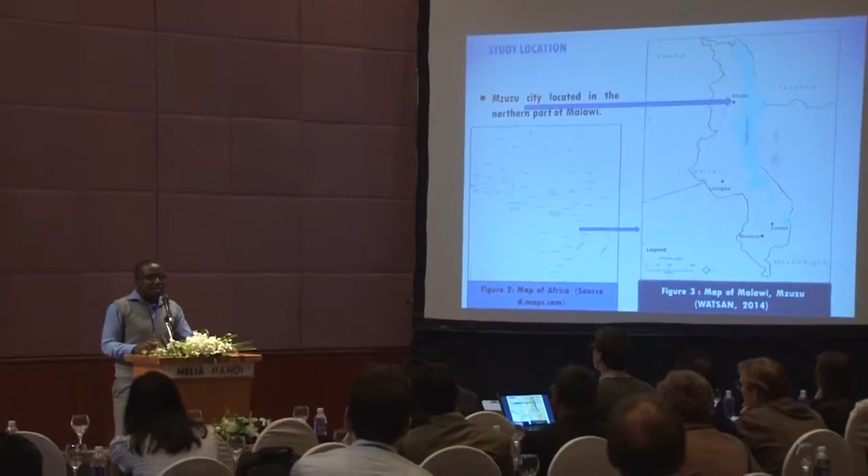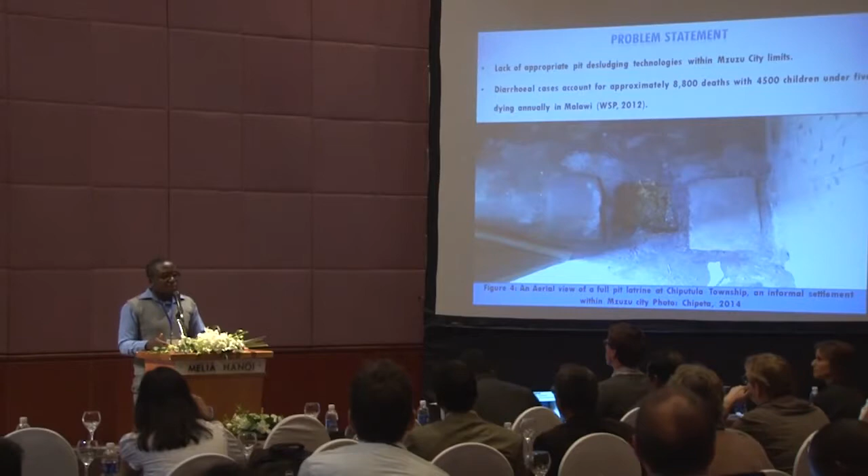The major challenge being experienced in Mzuzu City is lack of appropriate pit desludging technologies. In Mzuzu City, there are vacuum tankers that are run by the municipal authorities, but also by private operators. These vacuum tankers mainly patronize the planned areas and empty septic tanks. And the only option that is left for those that are using pit latrines is that they either have to look at the possibility to dig a new pit latrine and meet space constraints, or rely on informal pit emptiers, which are just manual pit emptiers, which can be associated with a lot of health risks for pit emptiers and also the households themselves.

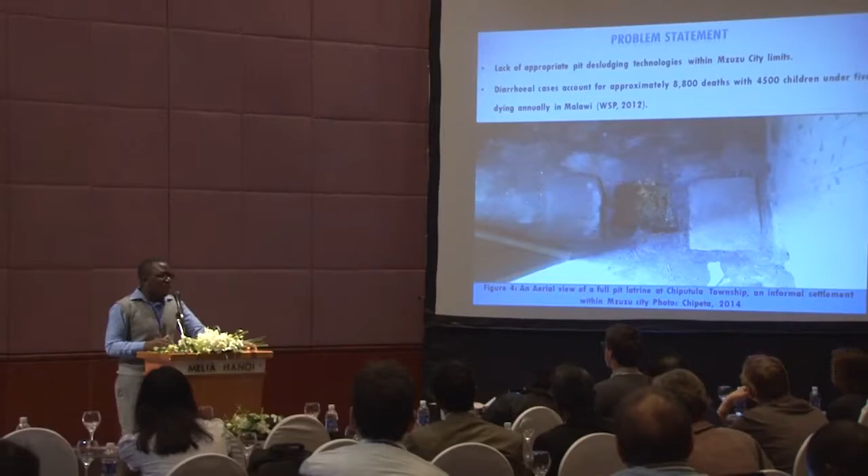And here is just a picture from one of the informal settlements, Chiputula, just to highlight this aerial pictorial view of a full pit latrine, which we try to alleviate by possibly suggesting technologies that are relevant and contextual to Mzuzu City.

Just a bit of background. The main criteria focused upon for the technologies is that we thought of developing a technology that is low cost, effective, safe, and sustainable. And within these parameters, when we did the literature research, we focused upon modification of the treadle pump. These are pumps that are normally used for irrigation, and they depend on suction power to empty, and they use treadles that manipulate a rope which goes around a pulley, and they use piston strokes that move up and down.

The upward stroke sucks up the sludge in this case, and the downward stroke pushes the sludge so that it can move to the discharge pipe. And from this conceptual setting, we adapted the technology with the support of other consultants, especially our friends from irrigation, on how we can adapt the technology for pit emptying.

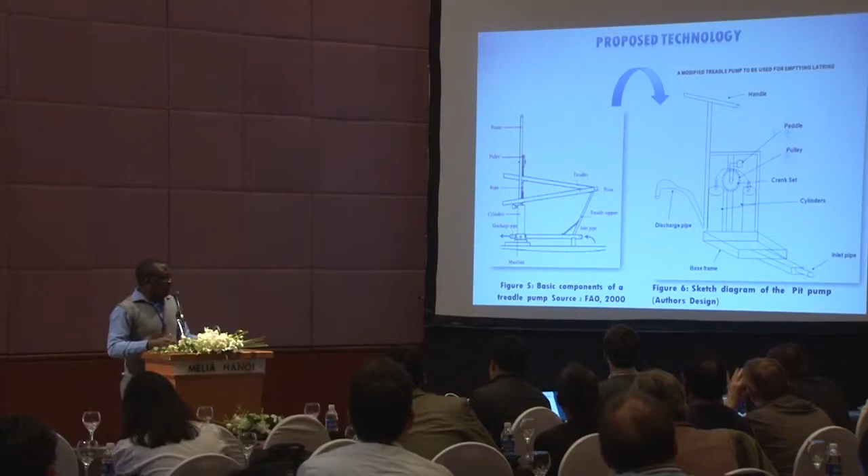So, on the other part is the sketch diagram of the pump, which is the conceptual setting. And on this, what we did is just to replace the rope with a bicycle chain, and also to put pedals instead of the normal treadles, so that we can see if possibly this can also be used as another technology for pit emptying.

And the discussion on the changes that we have made regarding the pros and cons of the technologies are as follows. Firstly, we believe that the technology can potentially be low cost and sustainable because all the materials that are being used are available locally, whether it is the chain parts or the other nuts and bolts, available in many shops in the developing country context.

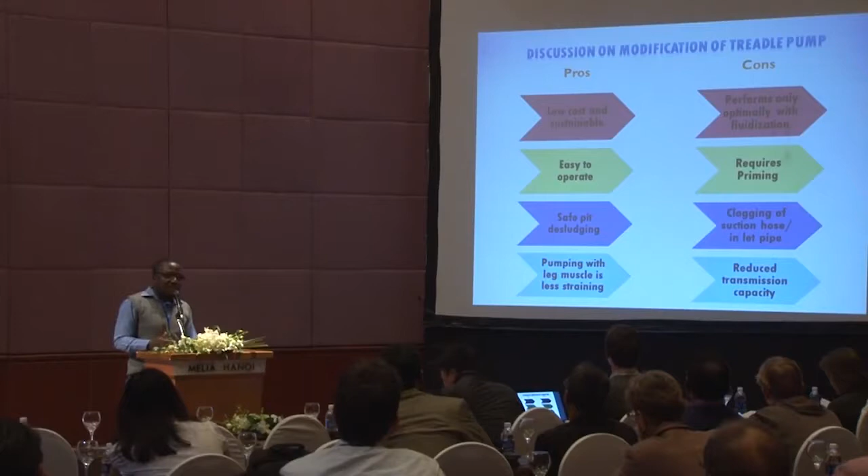And again, we believe that it can be potentially easy to operate because it can be almost like using a bike, so it is literally something that people can easily adopt and use. And also on the safety part, we are looking at the possibility that with the treadle pump, you can just insert a hose in the sanitation hole and possibly just cycle outside the pit latrine. So that can be helpful, especially in pit latrines that are light, that sometimes when you try to empty it from inside the pit, they can potentially collapse because of the weakening of the surrounding pit.

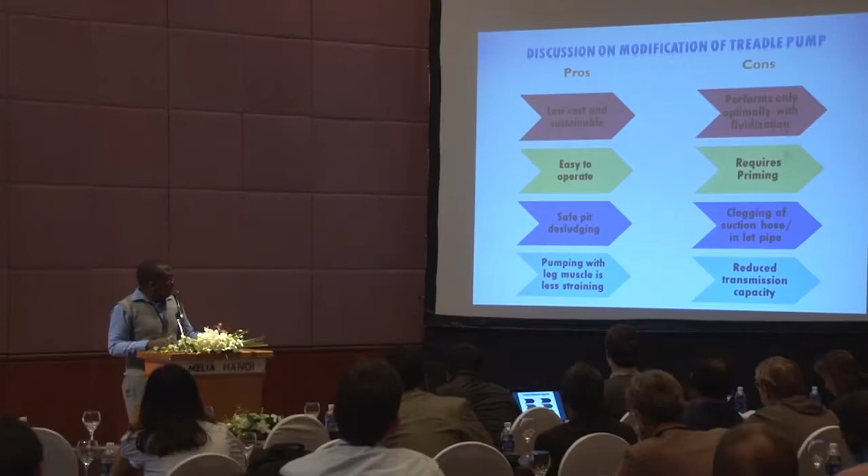And finally, we thought that for this technology, the major advantage can be that pumping with leg muscles can be potentially useful and less straining than using upper body strength. And on the con side, we also looked at the possibility that this technology can only perform optimally when the sludge that you are trying to empty is fluidized so that the pumping can take place.

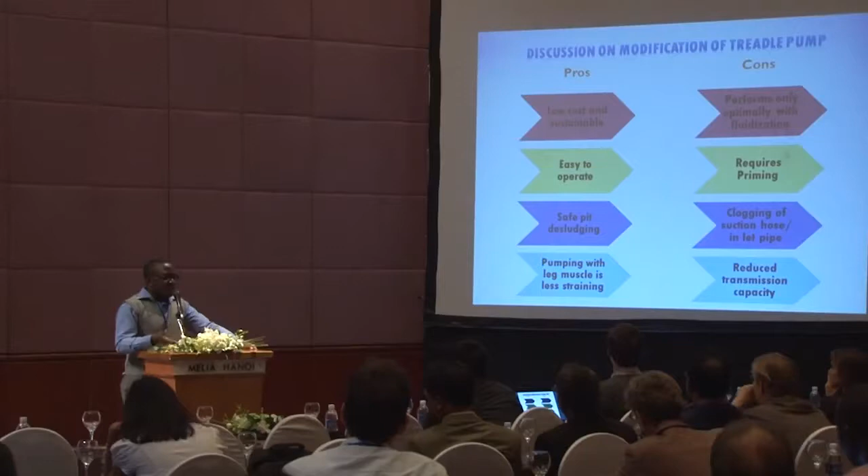And also it requires priming, which by the pit emptiers can be viewed as extra work. And also, we envision, because we have seen from other presentations, that there is a lot of trash in pit latrines. So there are many things that can possibly enter the suction hose and cause clogging. So this also has to be tackled, possibly with a strainer or a filter, to help reduce the issues.

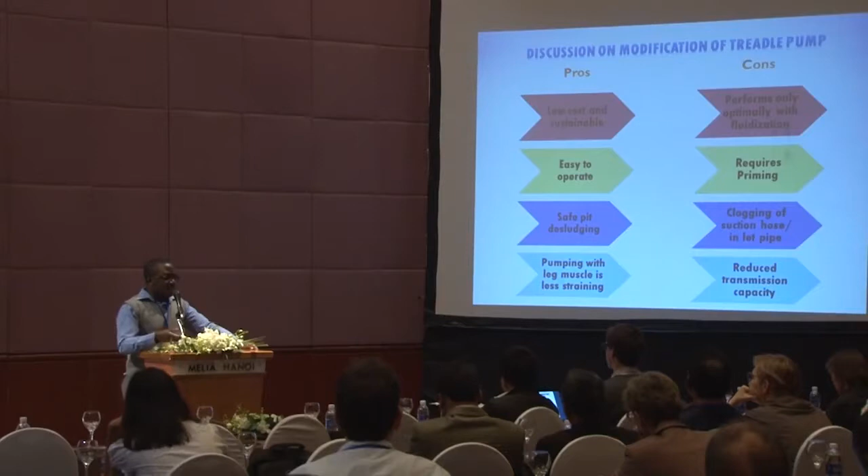And also, we are looking at the issue of reduced transmission capacity. This is looking at the material itself that we are pumping out. When it moves through the suction hose, materials such as the sludge can possibly settle in the inside part of the hose, so that it can reduce the actual working diameter of the hose and reduce the flow that can pass through that hose.

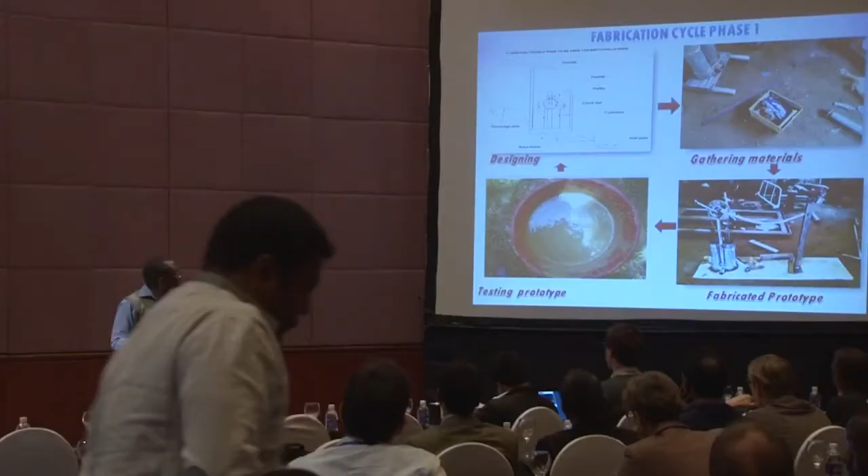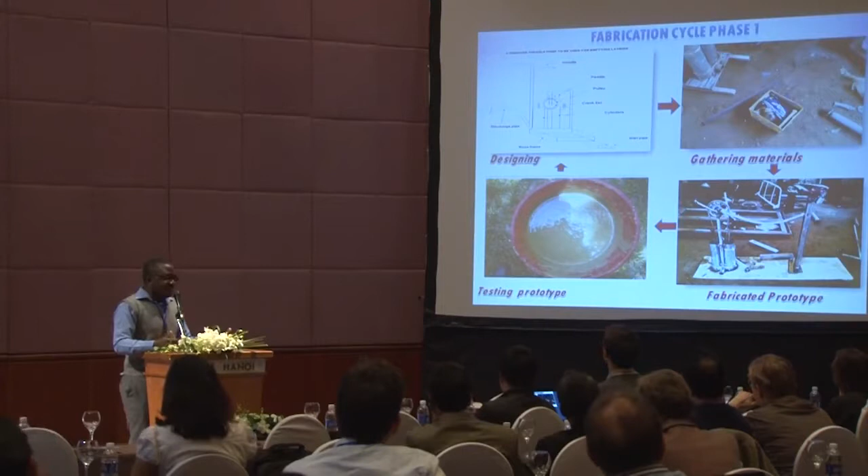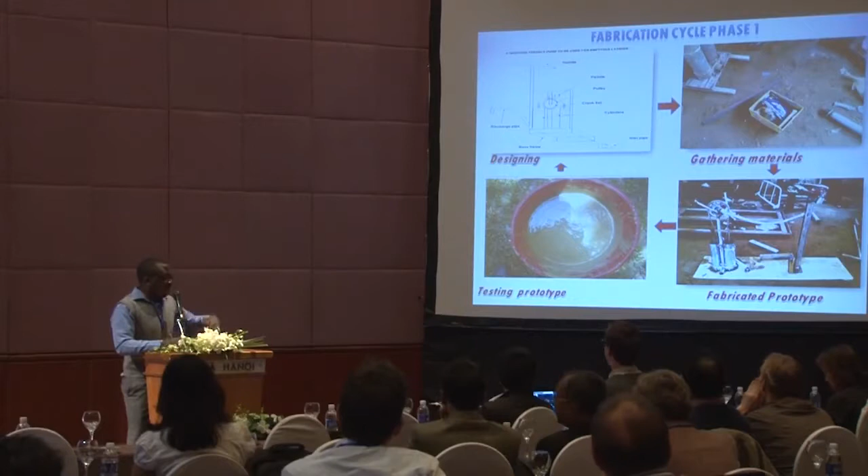Armed with that conceptual design and trying to test out the concept better, we started to gather the materials, and we went to some local welders to show them the design, which in the first instance did not work, but we had to make some modifications on site, brainstorming on our feet, and test it on some light mud slurry to see what was happening, and this was an opportunity for reviewing the design for further phases.

The background voice is just someone trying to cheer me on.

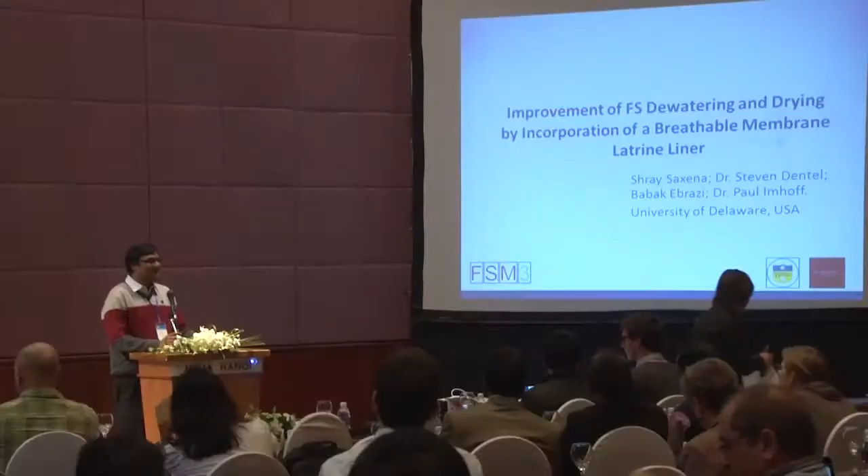Thank you for that introduction, so good morning. I want to talk about my project on improvement of fecal sludge dewatering and drying by incorporation of the breathable membrane. So I would like to point out a few statistics from the Indian sanitation program, and I'm doing this because we plan to test these breathable membranes in due time in India.

So we have 638 million people with no access to a toilet in India. It's about 59% of the total world population who still practice open defecation, and they still live in India. We have 40% of the urban population in India not having access to improved sanitation facilities, and of course more cell phones than the number of toilets, as has been pointed out throughout the conference.

So going through these statistics, I feel that my thought process on a solution to open defecation in India is basically a matter of space, money, and the attitude change of people. And I hope to address the space and money aspect of it through this project of ours.

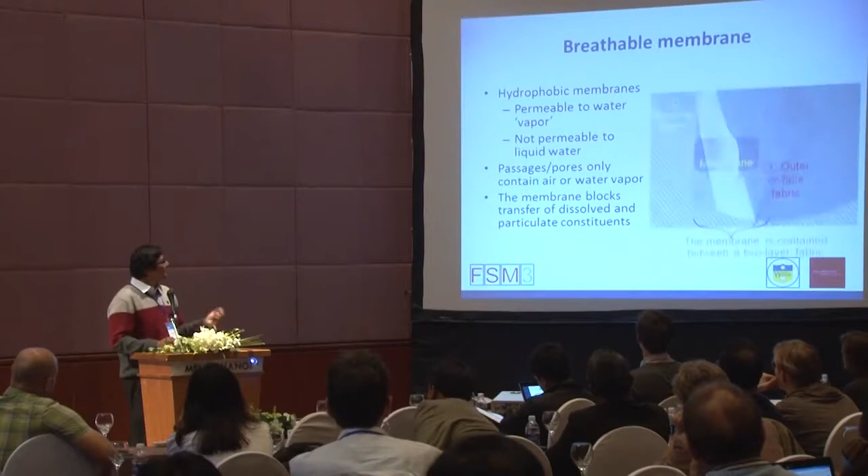This is a picture of the breathable membrane that we use for our testing. This is a 3-layer membrane, and as you can see, the white membrane in between is the hydrophobic part, and it is sandwiched between a support layer and an outer face fabric.

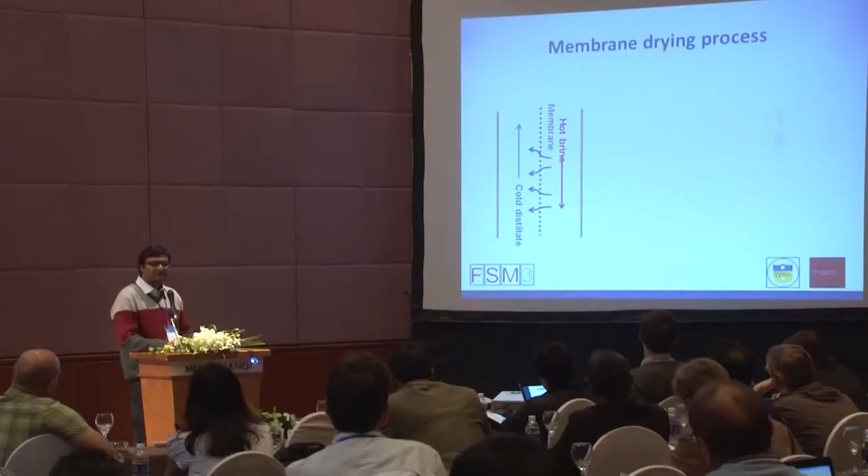So to describe our process, I would like to go through the membrane distillation process first. It is extensively used in desalination processes around the world. So we have the membrane in between, and we have the hot brine solution on one side and the cold distillate solution on the other. Due to the partial pressure gradient or the temperature gradient, there is a gradual flow of water vapor from the hot brine to the cold distillate, thereby getting us a concentrated salt solution and a dry solution on one side.

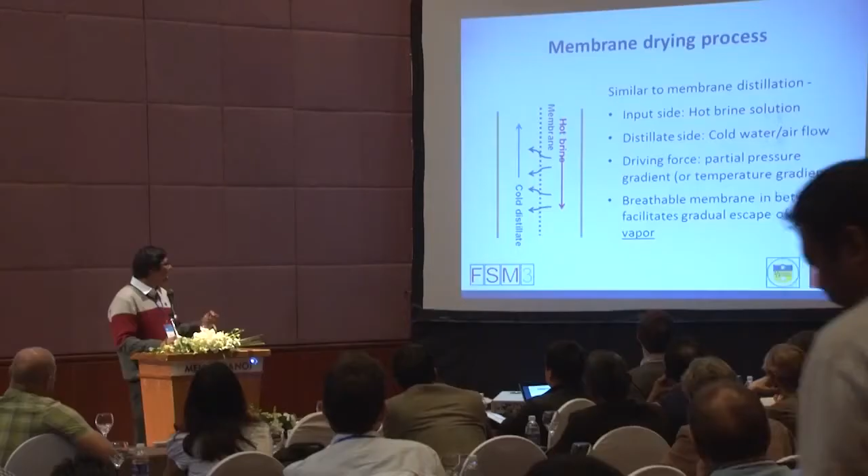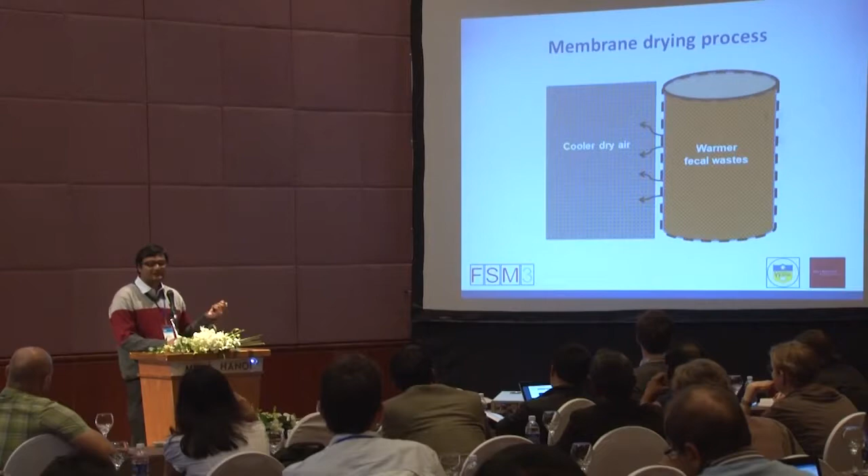So to apply this to our context in management of fecal sludge, you can imagine a 55-gallon drum of this breathable membrane, which would have, say, warmer fecal wastes. You have cold dry air on the other side, and as the process indicates, there would be a gradual flow of water vapor through the breathable membrane, and you would have dry fecal matter on one side and pure water on the other.

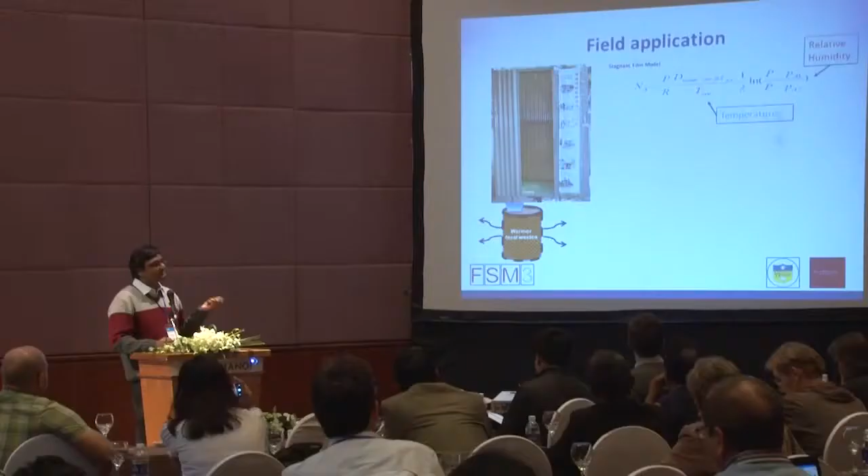Now to get to the sciencey part of it, this is what I've been doing for the past 2 years, basically trying to describe this process a little better. And now we know that this is the equation that governs the flow of water vapor. It's the stagnant film model, if anyone wants to look it up. As you can expect, it has the two major parts that govern this equation, which are the relative humidity on the outside and the average temperature across the membrane.

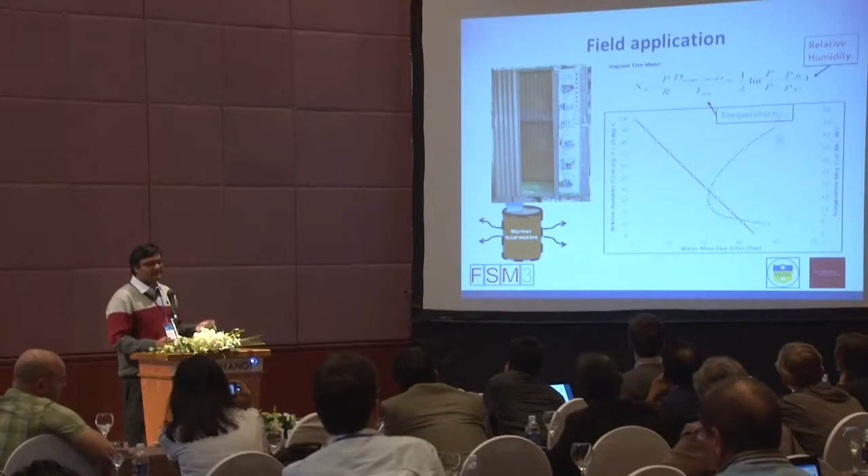To give you an idea of how these two variables affect it, this is a simple graph which points out that as the relative humidity decreases, you would have an increase in the water mass flux, and essentially you would have a higher drying rate when you have a higher temperature or an extremely low relative humidity.

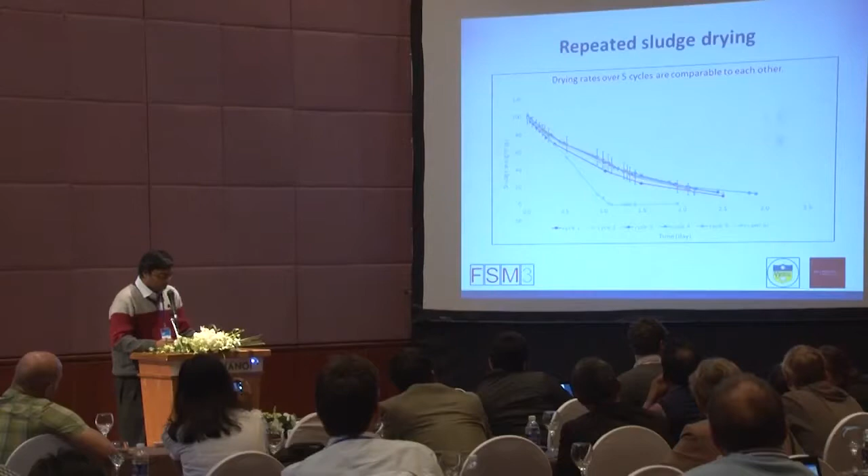So we tested this on a small scale system in our labs, and we've done this a few times. This is a 5-cycle test where we tested one simple membrane with fecal sludge over 5 cycles. As you can see, the drying rates or the drying characteristics are very similar to each other. So over a period of 5 cycles, we did not see much change or a loss in performance.

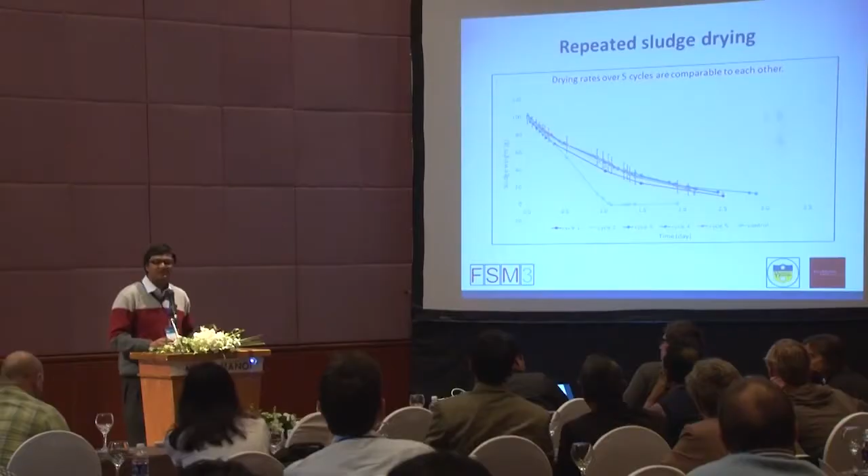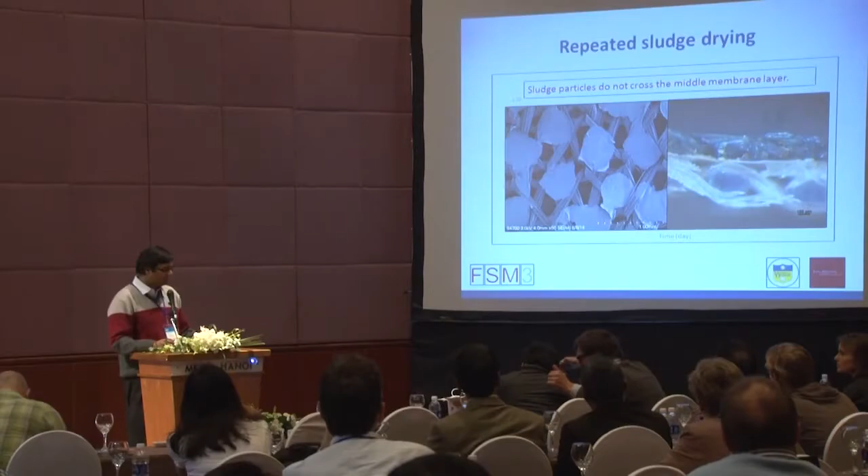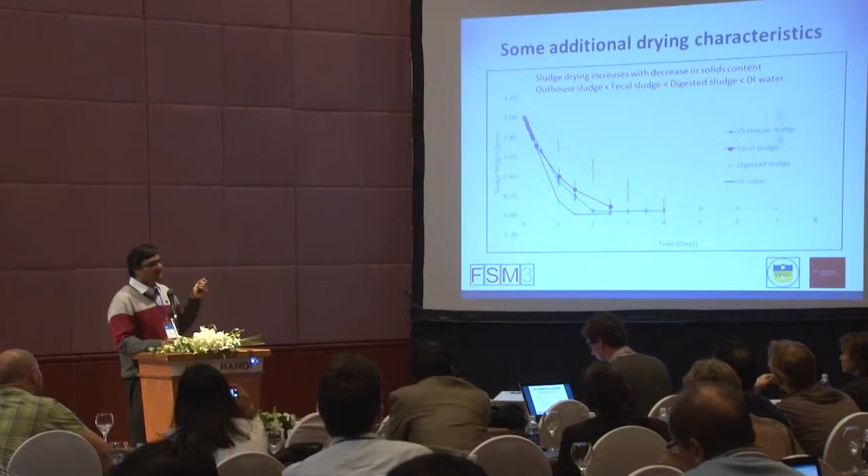A few other characteristics that I would like to point out that we found out. In this graph we tested four different kinds of sludge across the membrane, and we saw that the sludge drying increases as the water content increases or the solids content decreases. So in that order, you have outhouse sludge, fecal sludge, digested sludge, and then your plain DI water. And as you would see in the graph, you have the drying rates faster for DI water every time.

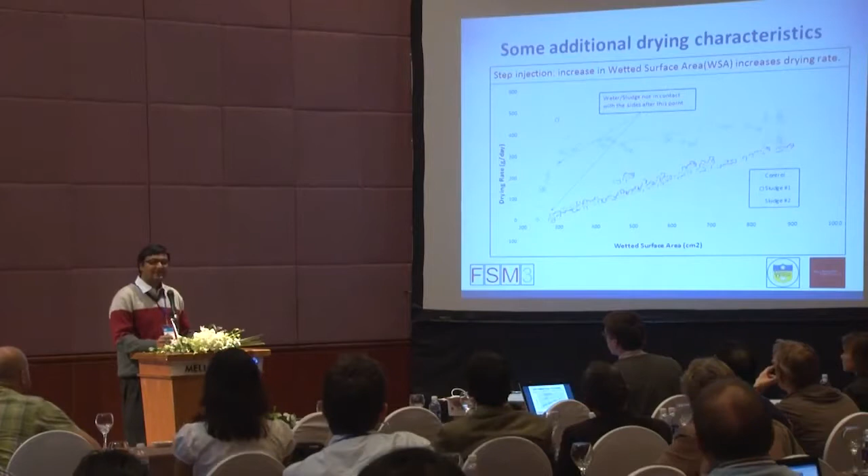We also saw, and I'm sorry for the clarity, but we did some step injection tests, which are more applicable to the field application in India. So we would have a small one going in and increasing the wetted surface area, which is in contact with the outside air and the sludge as well. It was indicated to us that that increase in the wetted surface area increases the drying rate, which was a good sign.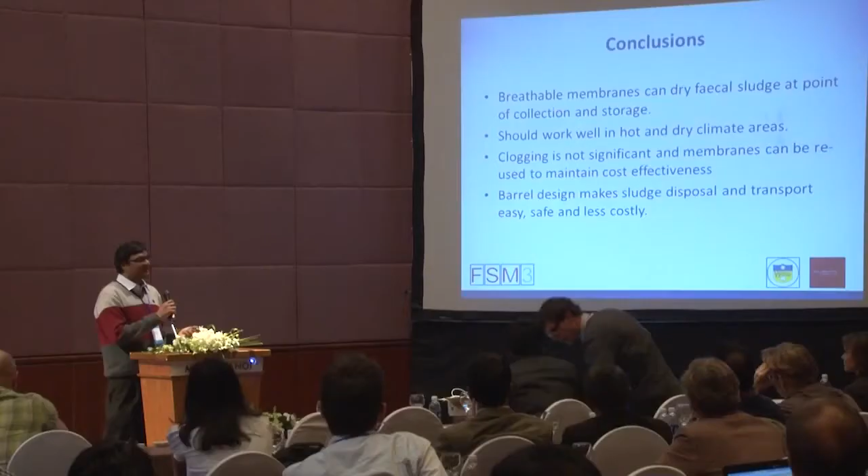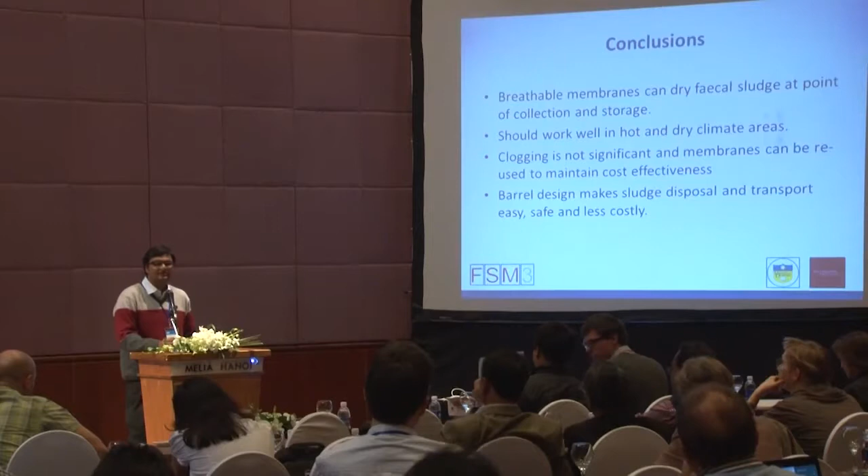So in conclusion, I would just try to point out that the breathable membranes can dry fecal sludge at the point of collection and storage. It should work well in hot and dry climate areas. Clogging is not significant enough to affect the process even after 5 cycles. Hence, it is reusable and cost-effective in the long run. And you have the barrel design, which makes sludge disposal and transport easy, safe, and less costly.

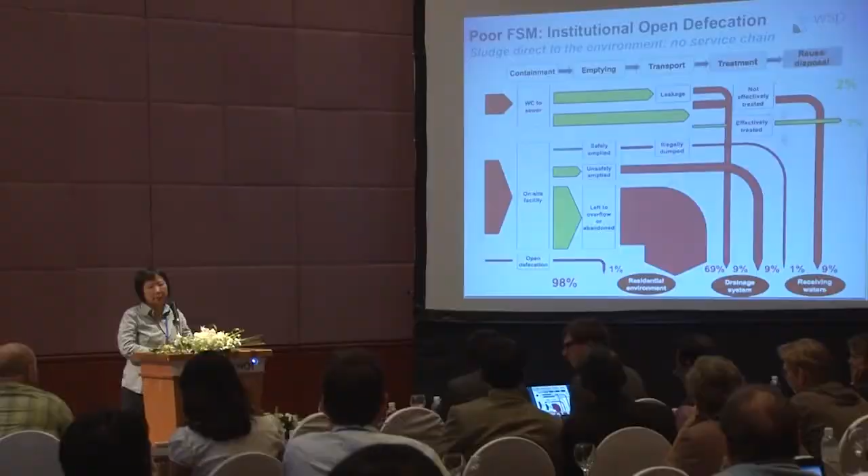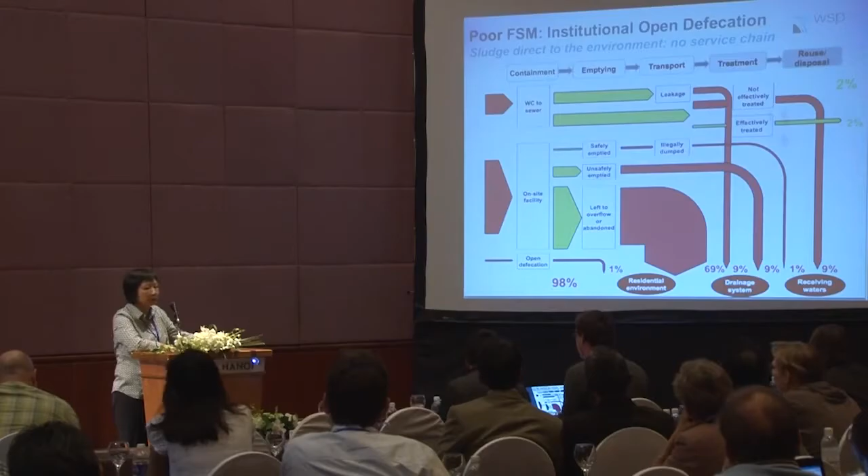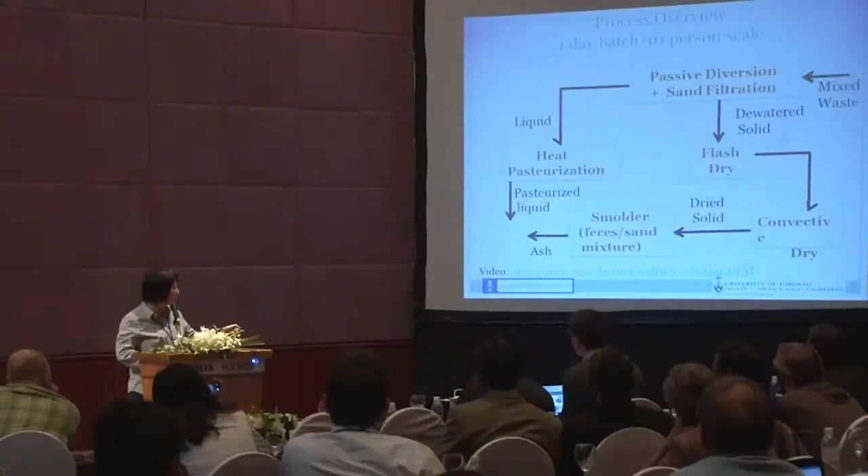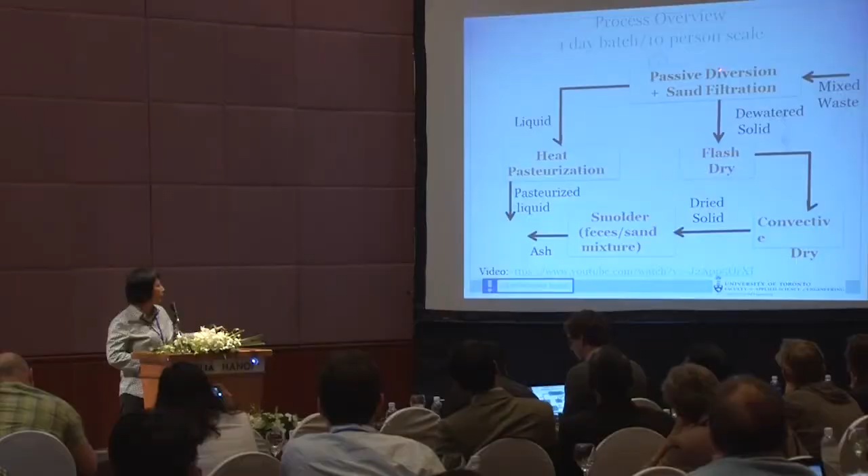And so what I'm going to talk to you about at a very high level is what our approach is and the thinking in our approach so that we get to an off-grid solution and what would make an off-grid solution feasible. So this is an overview of our process. So mixed waste comes in. We have a passive diversion process that separates and dewaters the solid. I say passive diversion and sand filtration. This is what we showed in the Delhi toilet fair back in March.

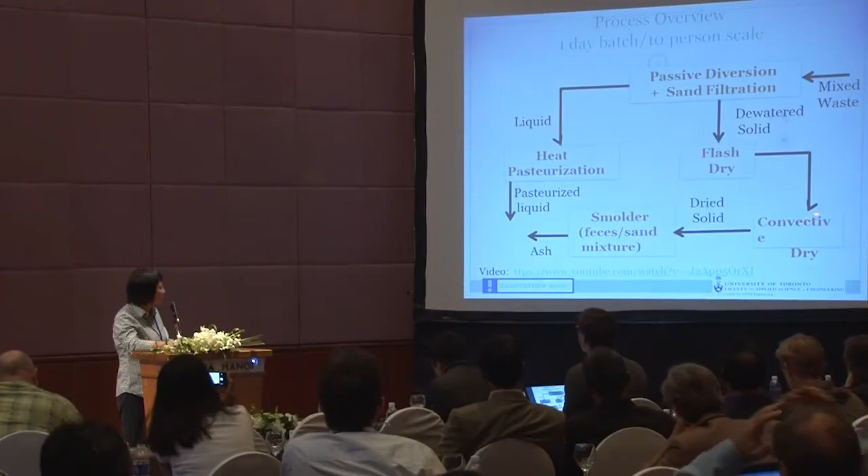The liquid goes into a heat pasteurization tank. The dewatered solid is flash dried and then convective dried. Sorry, the formatting got changed. Changed computers. And so the solid gets dewatered in one step in diversion and filtration. Then it gets dried. And then the dry solid gets smoldered. Essentially, we're drying the solid and we're burning. It sounds really, really simple. That's it. We just dry and burn.

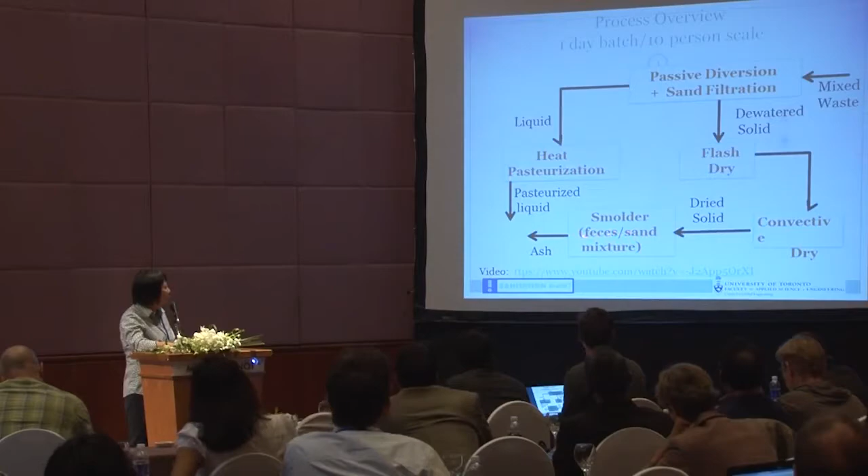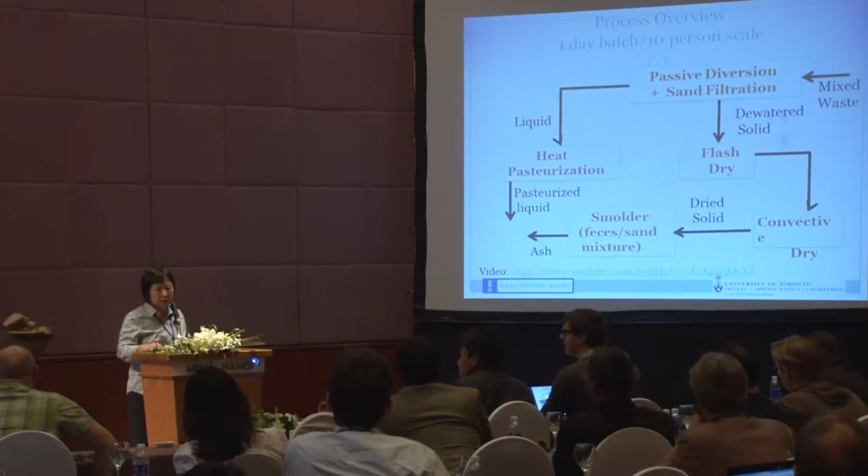And what we get out of the smoldering process is essentially the inorganics of the feces. The feces is completely destroyed. The temperatures in the smoldering reactor get up to 600 Celsius. So pathogens are gone, the solid waste is gone, and the liquid is pasteurized. And in the phase 2 process, it spends close to 24 hours in a 70 degrees Celsius kill tank.

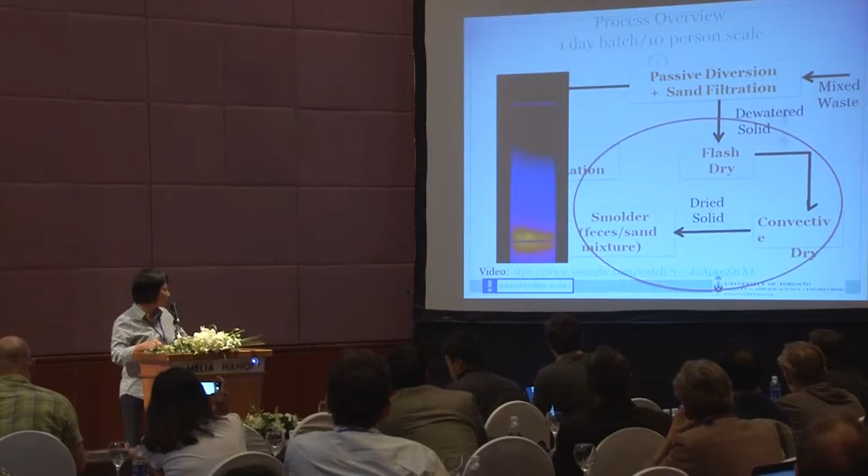So let me just talk about the smoldering a little bit more. So the slide says that the smoldering has a feces and sand mixture in there. So smoldering is, for those of you who haven't heard me talk about this before, the actual chemical reaction is the same as a fuel reacting with oxygen to form CO2 and water if it goes to completion.

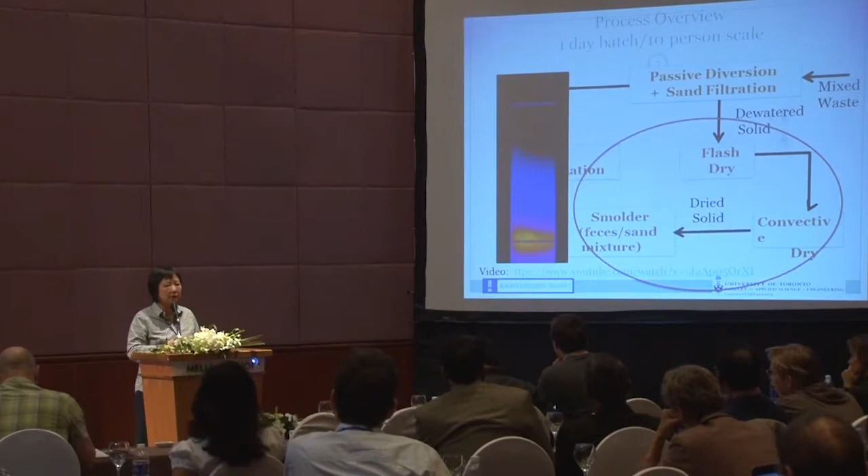But instead of an open flame reaction where the fuel has been volatilized and the reaction with oxygen takes place in the gas phase, a smoldering reaction takes place at the surface of the solid fuel. So oxygen has to get to the surface of the solid fuel and then reacts on the surface. So the difference between that and an open flame is that it's a more controllable process. It's a slower process, but

you have to provide porosity so that oxygen can get to the surface of the fuel. And feces is a soft material, it's compressible, so if you have a pile of that, then you're not going to get air to the surface of the fuel very well. So we mix the fuel with sand, and the structure of the sand provides the porosity so that oxygen can get to the surface of the fecal mass. So that's why we have a feces and sand mixture. Working with sand is a pain in the neck, but we take advantage of this particular feature as well, which I'll talk about in a little while.

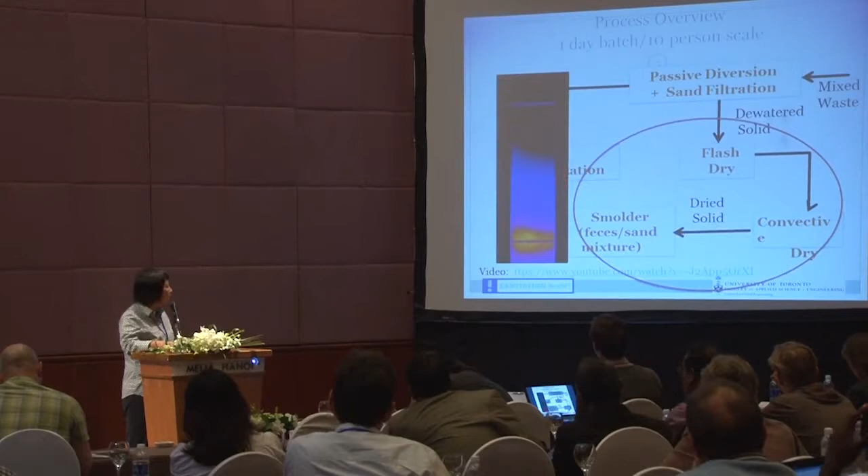And the way this works, this is an infrared picture of a batch column of a smoldering process. So we ignite the fuel and sand mixture at the bottom, and then as smoldering takes place, it actually takes place in a very controlled fashion, and that smoldering front, indicated by the red color, would move up over time. And so as time proceeds, we finish burning the entire bed of fuel in that column. And so that's basically how smoldering works.

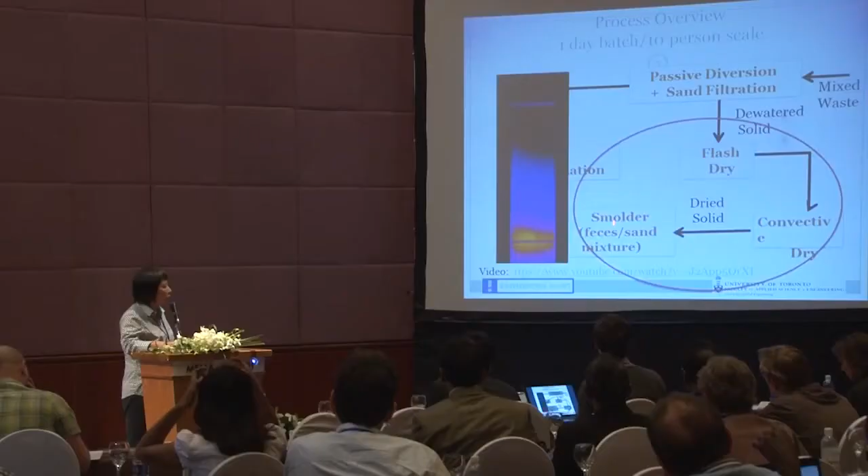I draw the circle here. There are a lot of different steps here, but I'll point out that what we did in phase 2, which we'll show in the Delhi toilet fair, the flash drying, the convective drying, and the smoldering all take place in the same vessel. So it's a single chamber. So that's the overall process.

The slide showed the mass flows. And what I want you to focus on in this slide are the red arrows. And the red arrows have to do with what we do with the energy flow within this process. As I said, in smoldering, we make use of sand. And even though sand introduces a complication in terms of material handling, we take advantage of the fact that the sand can act as a thermal battery. So when we generate the heat by burning the fuel, a large fraction of the heat that's generated can be stored in the sand that's being used. So we think of that sand as a thermal battery.

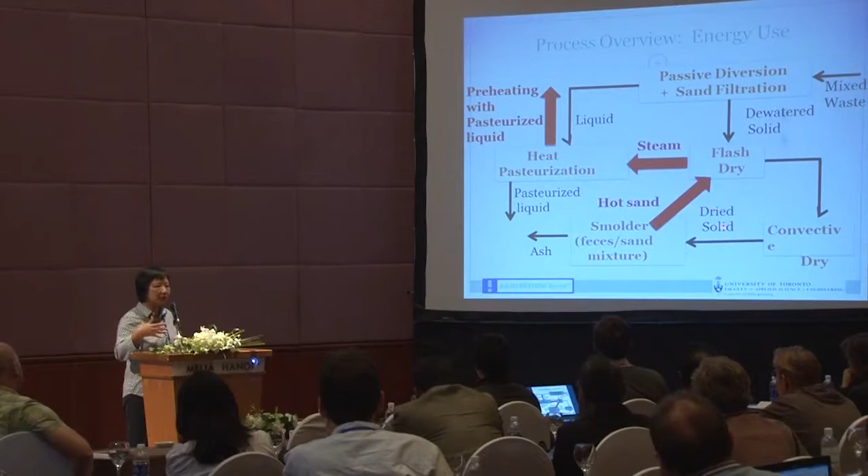So at the end of the batch process, we have hot sand. We introduce the next day's batch of feces into the reactor, mix it up, and that hot sand actually flash dries the feces very quickly. It's a very, very rapid process. It happens in a few minutes. So the advantage of that is, in addition to being able to dry very quickly, this is a fast process, we're actually generating steam very quickly. The steam is generated in just a few minutes.

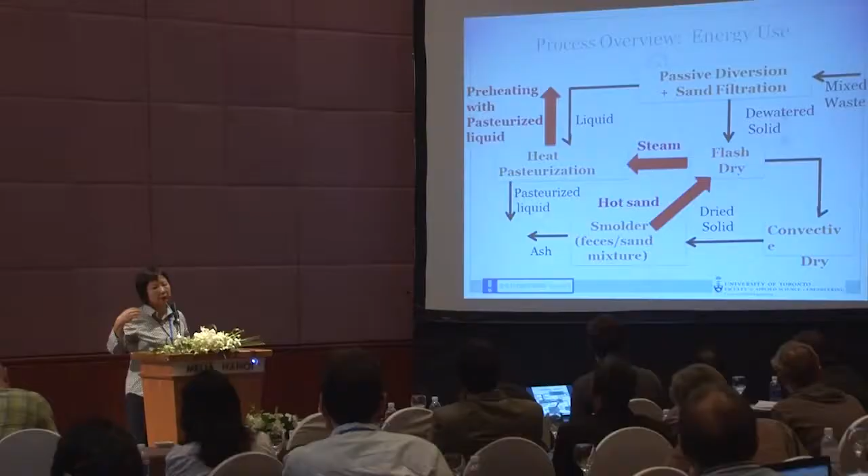So we can then direct that steam into the heat pasteurization tank, and through condensing coils, condense that steam, and use that enthalpy of condensation to heat up the contents of the liquid tank. And one more time, at the end of the one-day cycle, the liquid in the pasteurization tank is still somewhat warm. We run it through a counter-current heat exchanger to preheat the liquid going into the building.

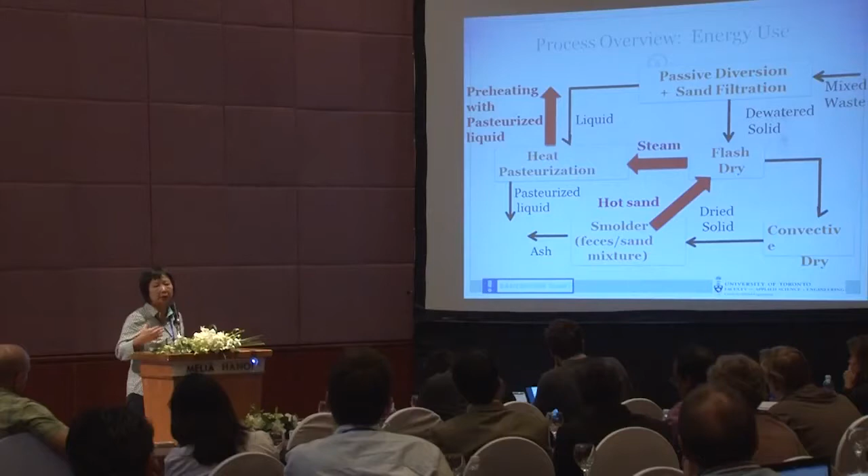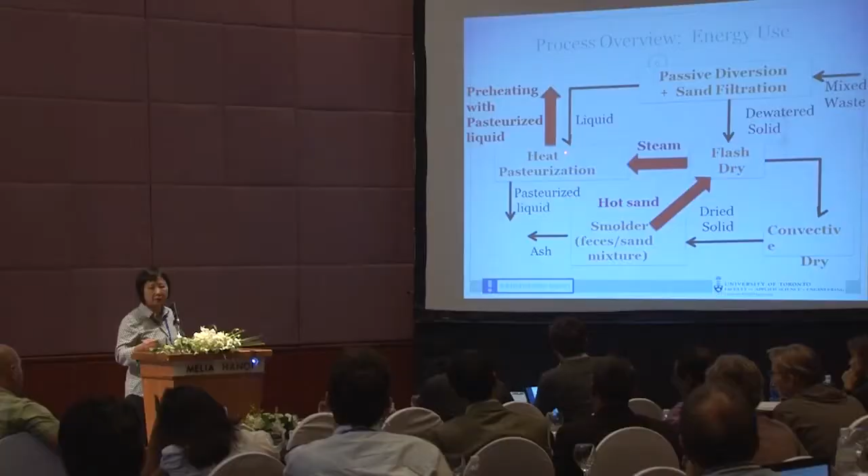So the energy management aspect of what we're doing: we store the heat generated using the hot sand as a thermal battery, and we use that once to flash dry the feces, use it a second time to heat up the liquid and pasteurize it, and use it a third time to preheat the liquid going into the tank.

So this is what we showed in Delhi, and those of you who saw it, it was a beautiful thing, and it was a little big, and I'll admit that. But it was a snapshot in time in terms of our design iterations. But what we're very proud of was that it was actually a fully integrated system, and we had run it multiple times, multiple days, either single-day cycles or multiple-day cycles, and run this very successfully.

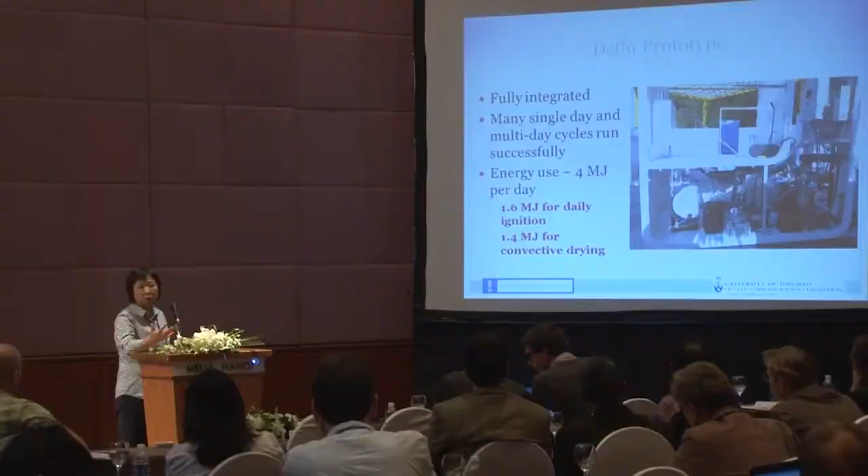There are a few things that we didn't like. It was too big, and obviously at this size it would be kind of expensive, but we also didn't like the amount of energy that we used, 4 megajoules per day. And we did a very careful analysis of where all the energy costs came from. And the two biggest energy cost items were the daily ignition. So to get the smoldering process going, you have to ignite the fuel at the bottom. It took 1.6 megajoules for that every day. And the second was 1.4 megajoules for convective drying.

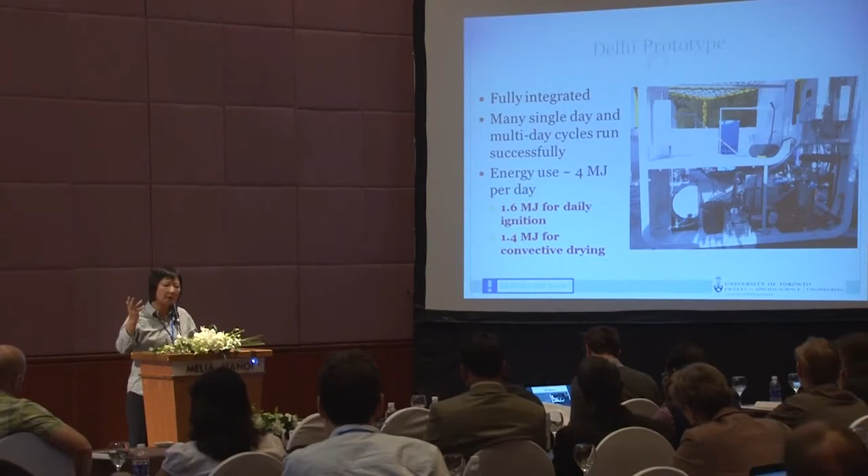So what happened was that even though this flash drying worked really well, it didn't get the feces dry enough to the point where it would smolder. So we then would pump air through this mixture in order to finish drying. And this turned out to be, in hindsight, a really stupid thing to do. It's very inefficient and cost a lot of energy. I won't go into all the reasons why, but that's why.

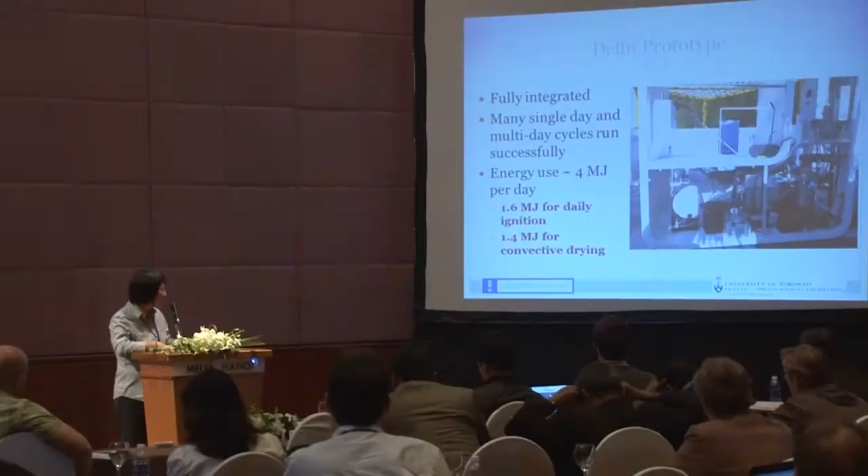The things we didn't like: the energy that we had to spend to ignite the fuel every day, and we didn't like convective drying. Not just because of the energy cost, but also if we're bringing air from the ambient in order to dry the fuel, then that process will be very dependent on the ambient conditions. So under high relative humidity conditions, that process will become even slower. And so we want to remove convective drying in the next step of our process.

So just to say a little bit more about the drying and dewatering aspect of things. Healthy feces is about 3 to 1 water, 75% moisture content. Our smoldering target, if we can get it down to 1 to 1, then we could burn it very robustly. We could do it at 60% as well, which is about 1.5 to 1. But 1 to 1 is a robust number. The input we had, the mixed waste of solid and liquid going into the process, was about 50 to 1. And of that, 3 to 1 was water and feces, so 47 to 1 was the free water.

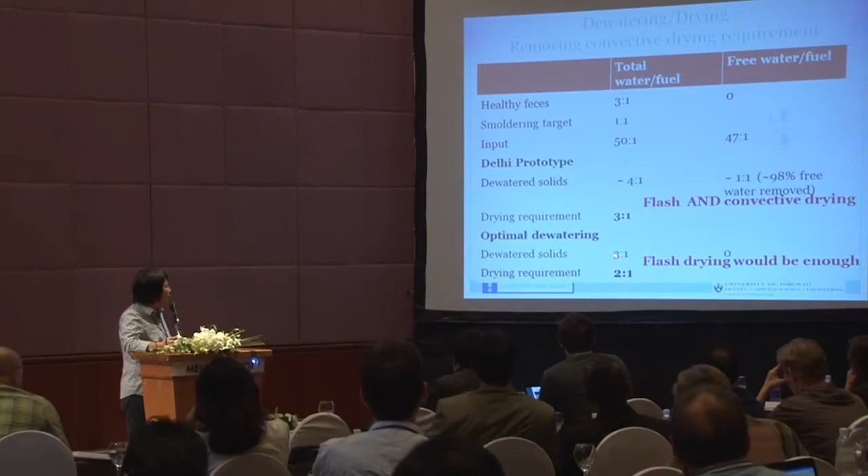But if we were able to remove all of that free water, then the water to solids would be about 3:1, and then our drying requirement to get down to 1:1 would just be 2:1. And at that level, we would have enough energy in the hot sand to flash dry and not have to convective dry.

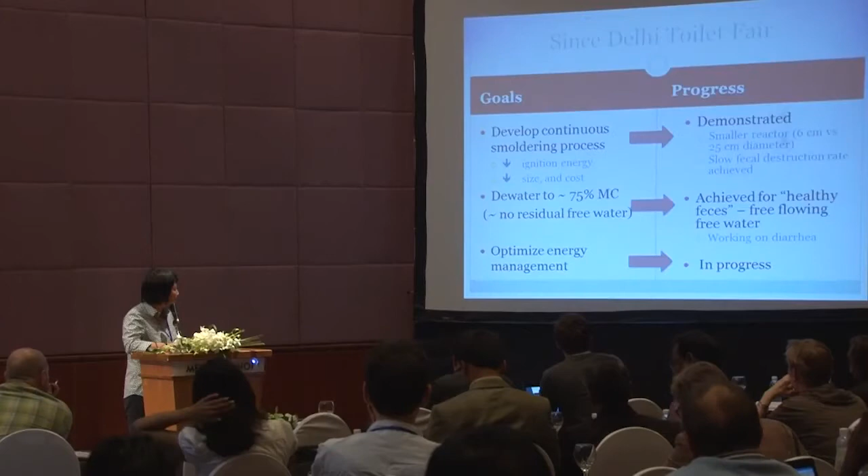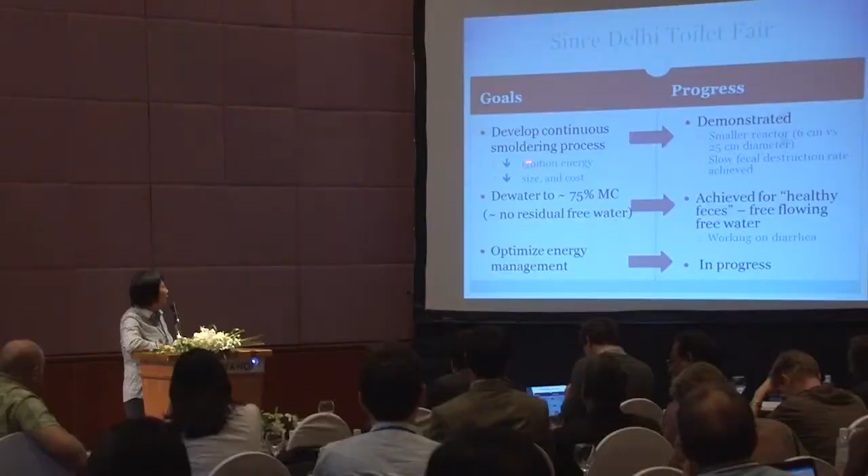So since the Delhi toilet fair, and I can't share all the details with you yet, just at a very high level, we have been able to develop a continuous smoldering process. This is one of our big goals, because that would then reduce the ignition energy. We wouldn't have to ignite every day. It would also reduce the size and cost. So we've been able to do this. We're very happy with this particular progress.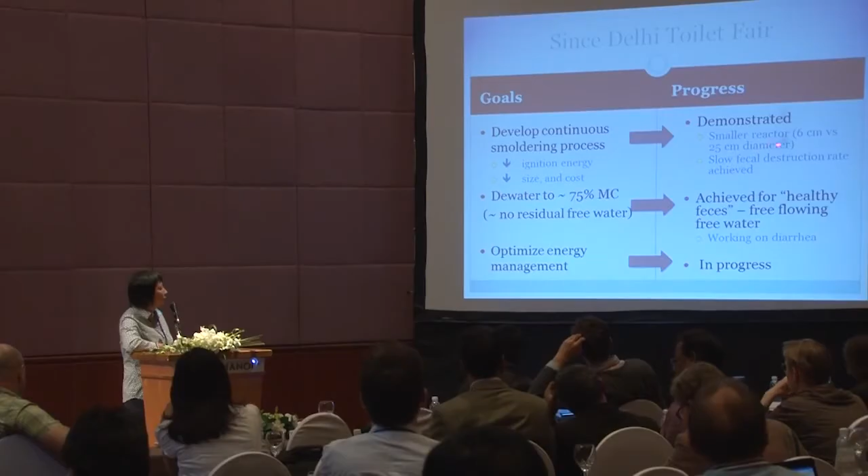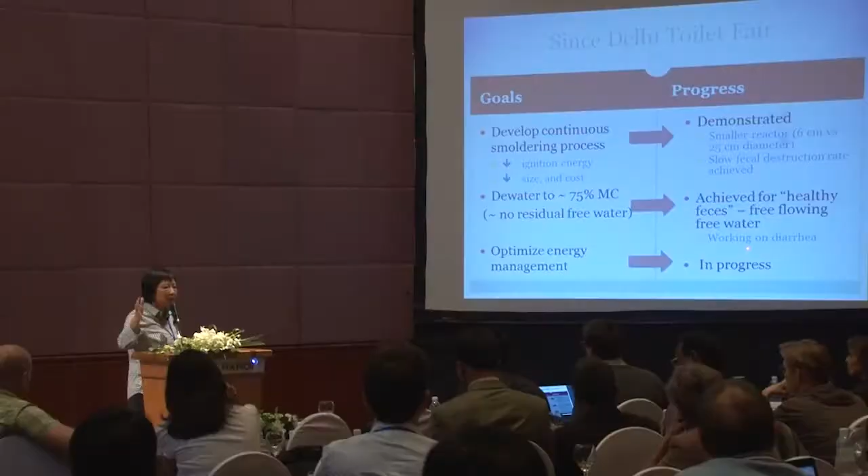And the reactor that we're using now is only a 6 centimeter diameter reactor. And we've been able to show, if you're going to run this process continuously for a 10-person scale, you're only smoldering, you're only processing about 30 grams per hour. And imagine trying to keep a continuous burn at that slow of a rate. We've been able to achieve about half of that. And we've also been able to de-water down to about 75% moisture content.

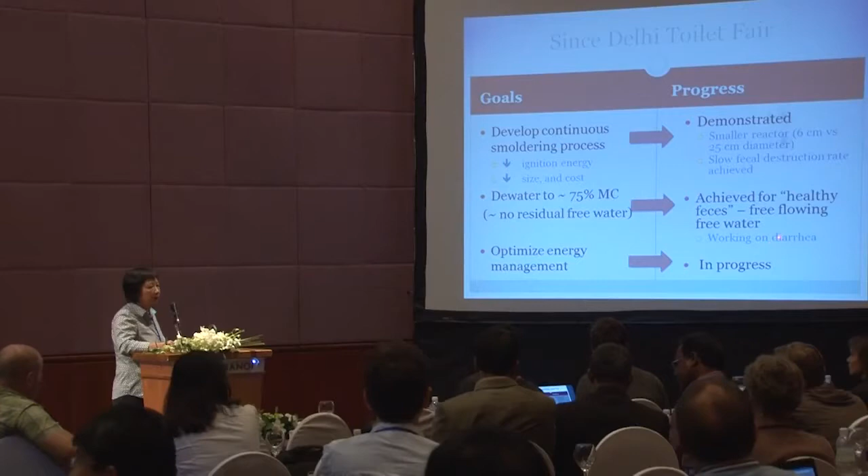So we've been able to do this for healthy feces. We're trying to work on what to do with that yet. And some changes happen once we move to a continuous process. So there's some tweaking we have to do with the energy management. That's in progress.

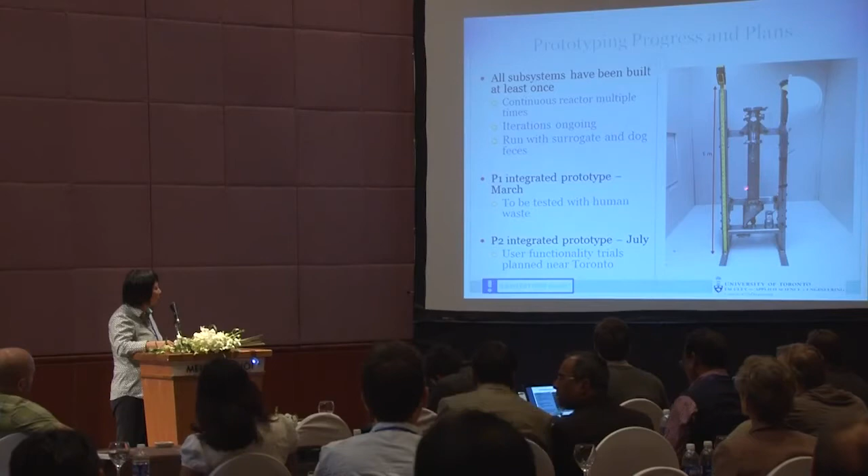So we're building subsystems and prototypes. This is the first version of the reactor that we built. Altogether, this is one meter. This is 6 centimeters, and the active part of this is only about 30 centimeters. And our plan is to build a fully integrated prototype by March. First version and second version will be July, with varying degrees of functionality testing.

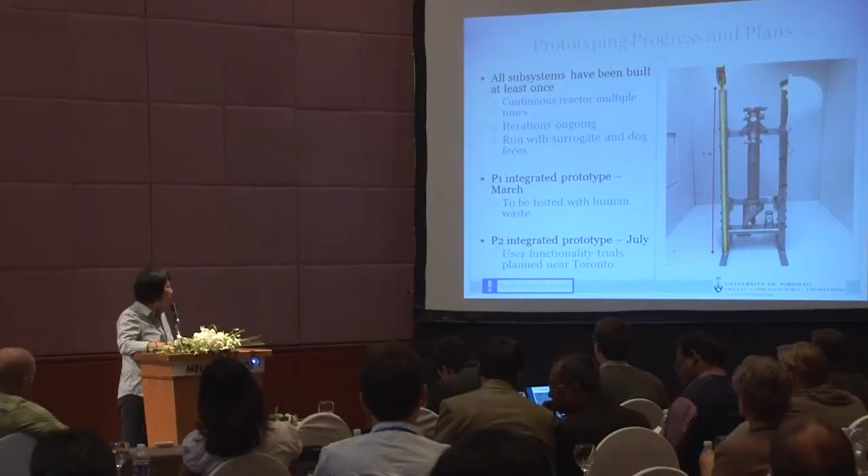So if all this works, the final system, our estimate of the electricity requirement is only about 0.15 kilowatt hours per day. And the key here, just to tie it back to the initial point, is in managing the energy efficiently so that the amount of extra energy needed in the solar panel or so forth is minimal. And so that's the final point I'll make on that. And that's it.